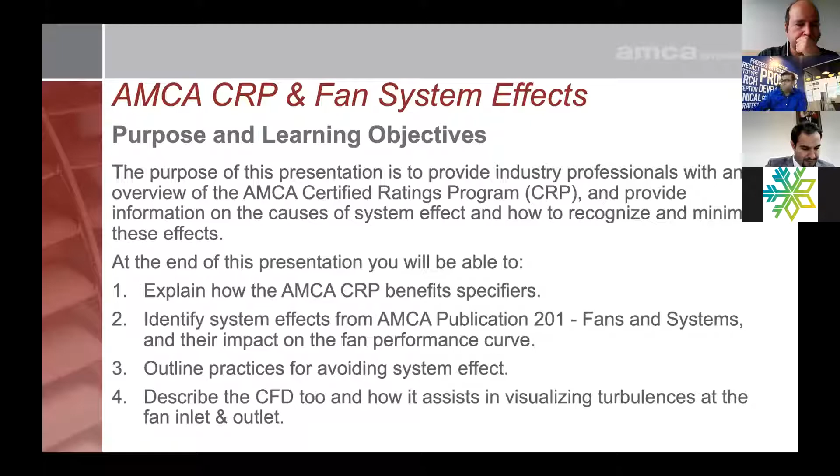So, introduction to AMCA. As you know, their prime mission or prime focus is advocacy. 80% of their part is certifications, and then they do educations like a seminar that we are doing right away.

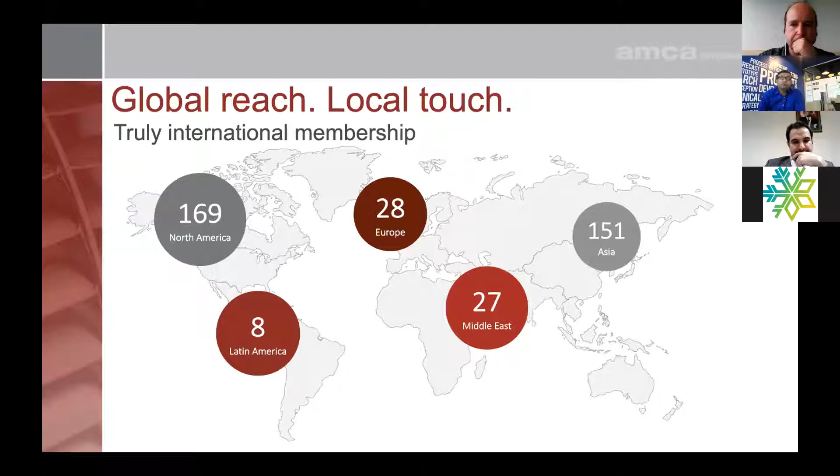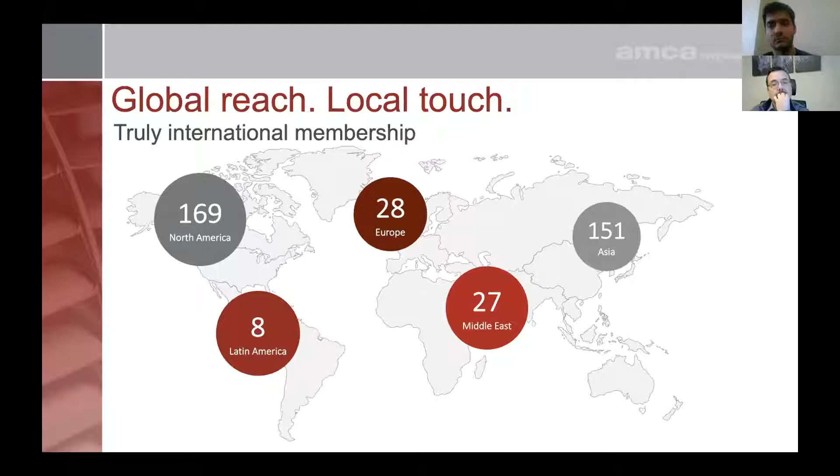So our global reach: we started as a company in collaboration with a few manufacturing companies in the US. Right now the strength is 169 in North America, then Latin America we are 8 members. Europe we are growing, we have a separate chapter there with 28. Middle East is a very promising chapter, we have a separate director who looks after this market. I'm working as a marketing committee member here, and we have 27 members. And in Asia, it's the fastest growing member among the continents, at 151 to date.

So scope, just to give you a glimpse: we cover air curtain certifications, fans for residential and commercial, fans for fire smoke control, fans for industrial processes, for power plants, fire and smoke dampers, fixed and adjustable louvers, and so on.

So if you talk about the value chain at AMCA, we provide members with international standards and publications. We do have our testing chamber, and we also do accreditation CRP programs, even laboratory accreditation programs. Obviously certifications and rating programs are part of the standards as well. Then we do a lot of advocacy, industry relations, and marketing and educations to promote the value chain, focusing more on certifications to the systems, including products together, and then how that product is going to behave in a real scenario.

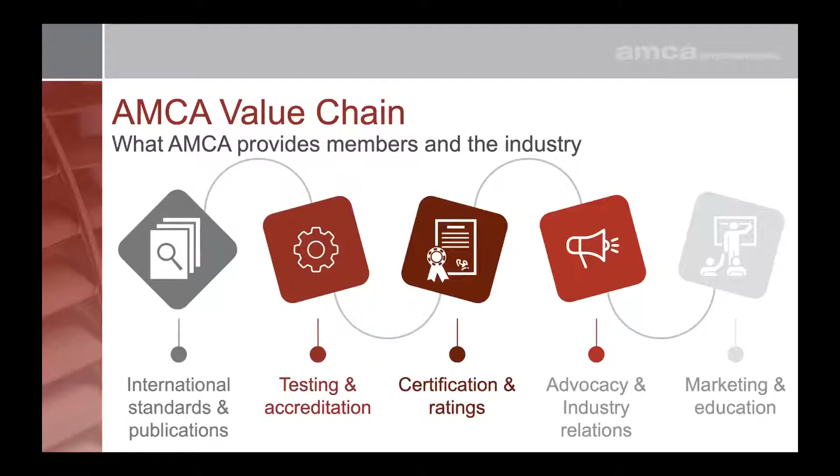So in terms of advocacy, there are legislative and regulatory bodies we are part of. We do have our own standards development process, publications, white papers, everything is part of the website. Industry relations is one of our major advocacy programs.

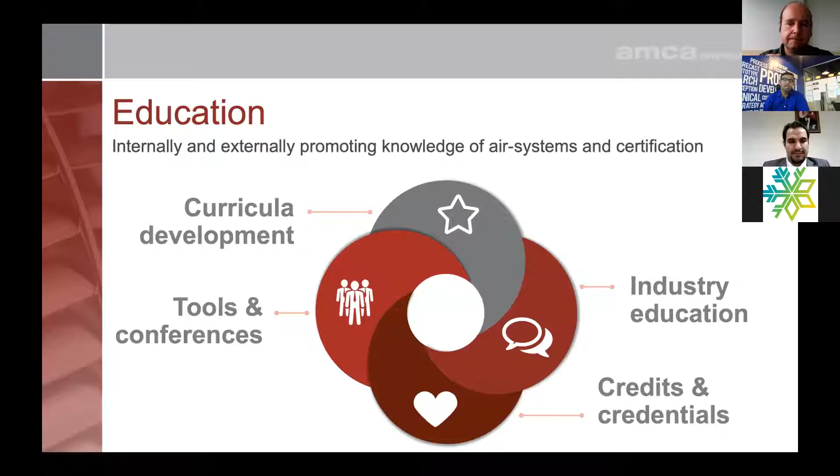In terms of educations, internally and externally, we like to promote the idea that today's presentation is generated by Mark, an executive director at AMCA. We like to focus on the areas that people are actually facing in a system and how to address those. So we do a lot of conferencing, we exchange a lot of tools, we share our knowledge, we try to transfer the past experience, especially what went wrong and what went well through the process, including building a new standard, setting up a new laboratory, or working with some regulatory body, let's say ISO 5801 and so on.

So everything is part of our website, it's a very dynamic website. If you'd like to see who is part of our certifications, who is certified, what are their efficiencies and so on, it's an easy navigating tool, you can navigate wherever you want. There's a program for educations wherever you like, and information on who are the members. So a full dashboard is available if you visit www.amca.org.

So I will touch a little bit on the AMCA Certified Rating Program, especially since building owners should know if their equipment is working day in day out efficiently or not. Air system products that are not certified are subject to heavy service and energy costs. That's why AMCA, the Air Movement and Control Association, started this Certified Rating Program.

So if you see how it started: let's say if you have a system, there's a problem ensuring product claims in their data sheets are actually meeting the standard or not. The solution is to find global standards and performance along with testing and third-party independent verification. And then you realize there should be a standard and rating program merged together, and that's how you get peace of mind that product claims achieve the rated performance. The result is a more level playing field and enhanced confidence, especially in product performance.

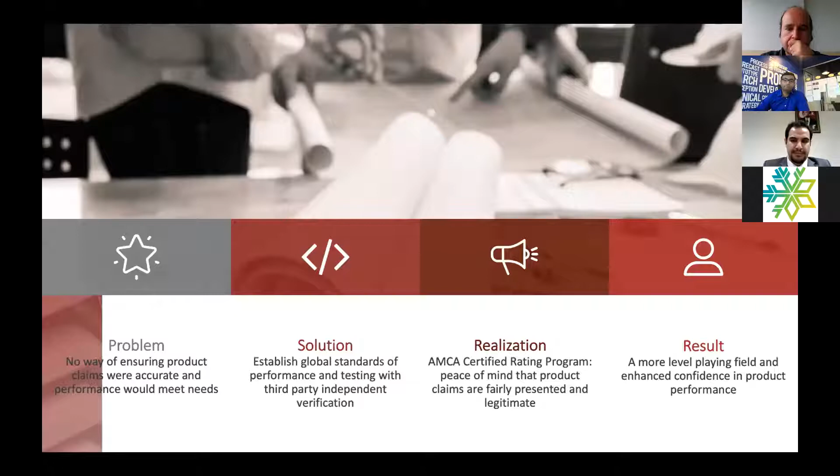So why specify products? I could see it's an apple-to-apple comparison, this is very, very important. Then you get clarity before you buy any AMCA certified products, also including reliability and ratings. Catalogs are up to date, because most of the time it's very difficult for a client to understand what they're buying; it's up to date as per the third-party certification program. AMCA has check testing to ensure that the manufacturer maintains their values within the tolerance limit as per AMCA 111.

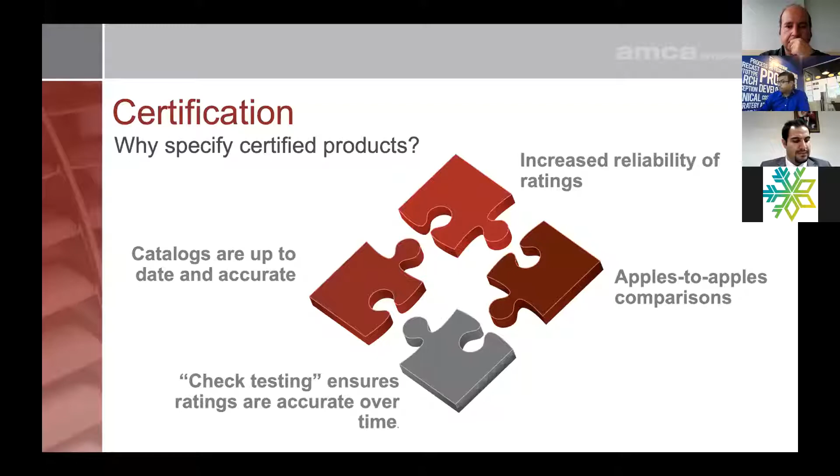So the process of CRP is very simple. First you apply, once you have a family of products, and then AMCA is going to review. They're going to pick the samples, and then there is a review program for the standards, which standards is led to. And then there is a testing and certifying process, and the authority will verify it.

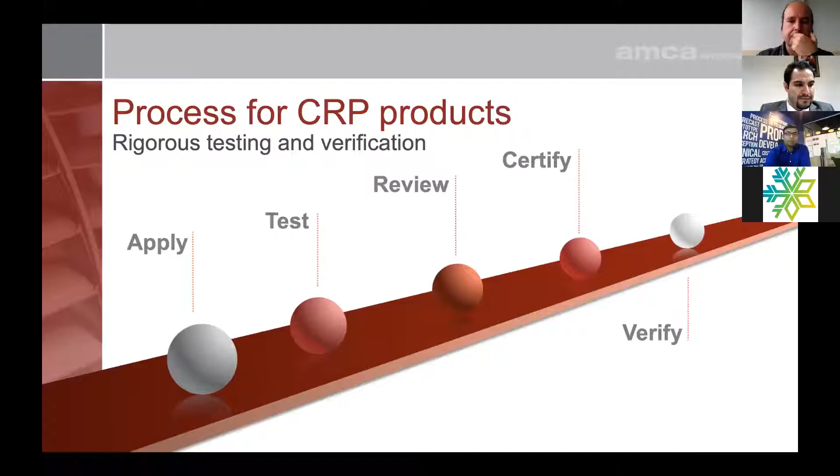Then you see yourself as a part of the website, and you officially get a seal, similar to these, whether it is air performance, air sound, FEG, wind-driven rain, or Sound Blower certification programs, whatever. But it's all part of the AMCA website. You can easily navigate through the same channel.

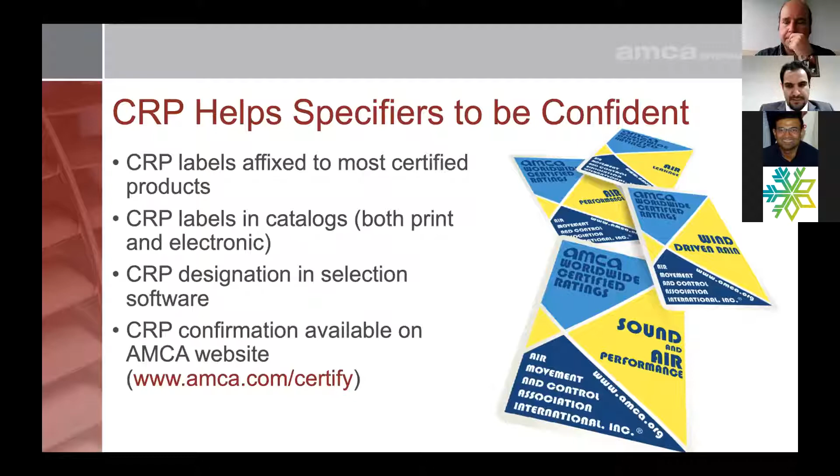So the audit mechanism is very simple. We have an independent testing body, with no bias towards any manufacturer. AMCA members and non-members alike are eligible to participate in the CRP, but it's better to be part of AMCA membership. AMCA Standards and Publications describe how the product is tested and rated.

The documents have been created with volunteers from all aspects of the air movement and air control industries. So the publications are reviewed by manufacturers, so that it's not a surprise to anyone. Once the product is certified, ongoing verification is conducted by AMCA through repeated check tests. Even if you have an accredited laboratory, they ask for repeated check tests.

Over a period of several years, product failure during any check test requires product inspection, recertification, and withdrawal as well. Refusal to comply with AMCA check tests, or failure to make the required product corrections, can result in product suspensions or CRP violations. There is another category on the AMCA website.

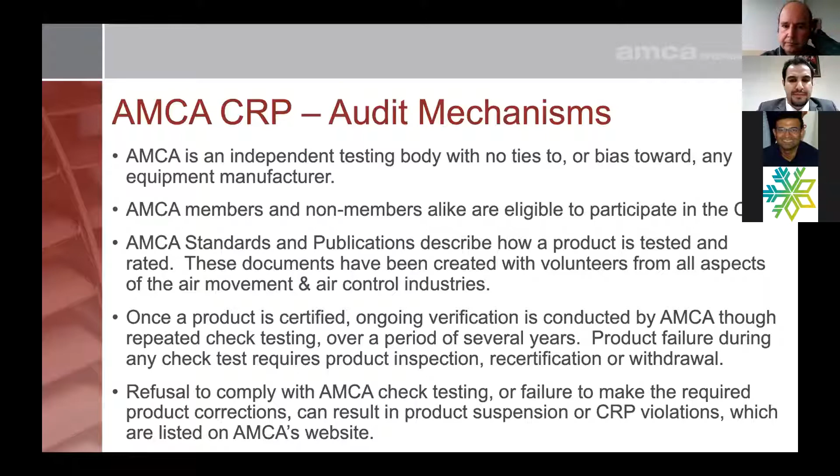Sorry, Mr. Tanmoy, sorry for the interruption. There is a problem with the sound. Would you check your microphone? It's crashing in the sound. Is it okay now? Would you speak again? Is it okay now? No, it's continuing. Do you talk with the microphone or with the computer? Okay, let me try something else. Is it okay? Is it audible? Yes, it's so good, thank you. I'm audible, right? Okay.

So let's start with fan system effects. We'll start with a quick check about fan safety. These are moving parts that can injure. Aside from the obvious hazards of the fan wheel, there are hazards of the drives, electrical components, shaft coolers, and those hidden dangers. Lockout and tag out equipment to protect yourself and others.

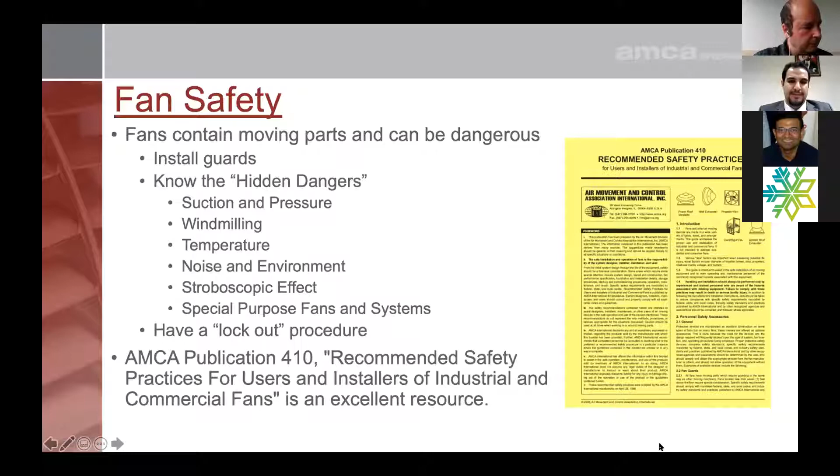Do not increase the speed or operating temperature of a fan above the manufacturer's limit. AMCA Publication 410 is available for free from the AMCA website.

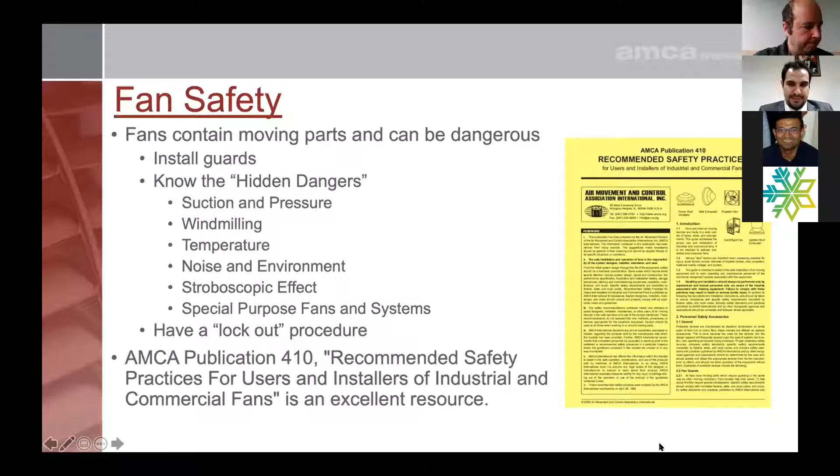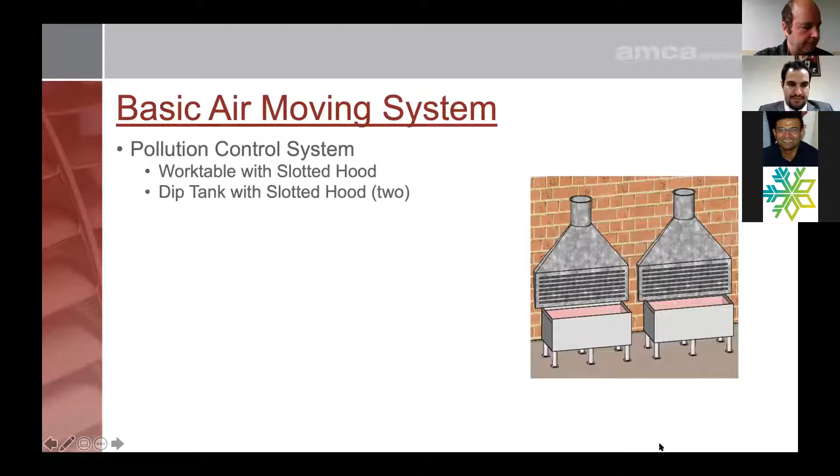So for our review of system effect, we made a basic air moving system with some standard components, which is a worktable with slotted hood. Then we have a dip tank with slotted hood. Then we have an air washer scrubber, which we also call a pollution control unit. And then a centrifugal fan, obviously with associated ductwork.

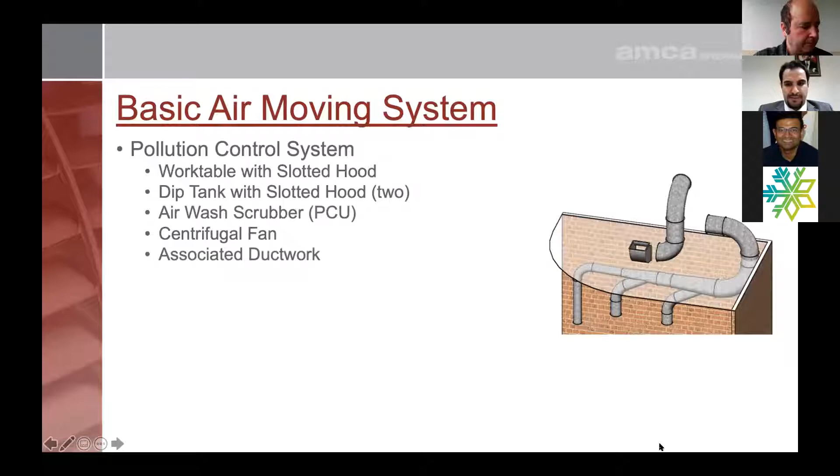And the calculation duty point is 15,000 CFM, which is 25,500 cubic meters per hour, at 6-inch water gauge, which is 1494 Pascal, at 1.2 kilogram per cubic meter density, approximately 21 degrees centigrade standard.

System effects are neglected, as you see from the picture. Not shown: replacement air in the system is taken into account but not shown here.

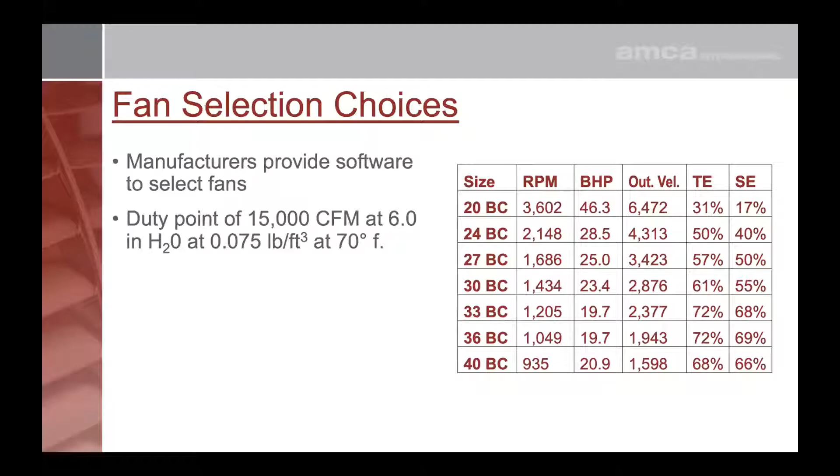So fan selection is automated and available from many manufacturers' software over the internet, desktop version. A review duty point at 15,000 CFM, 6-inch water gauge, gives 7 fans providing the required flow and pressure duty point. Although the models shown are only one model type, which is backward curve only, just for simplification.

There could be acceptable airfoil, industrial exhauster, forward curve, and other blade style selections. It seems easy at first: punch in the flow and pressure, and selections pop out. This is a short list; the list could be much longer. It's like searching a range on Amazon—a list of selections, a lot of selections, overloaded.

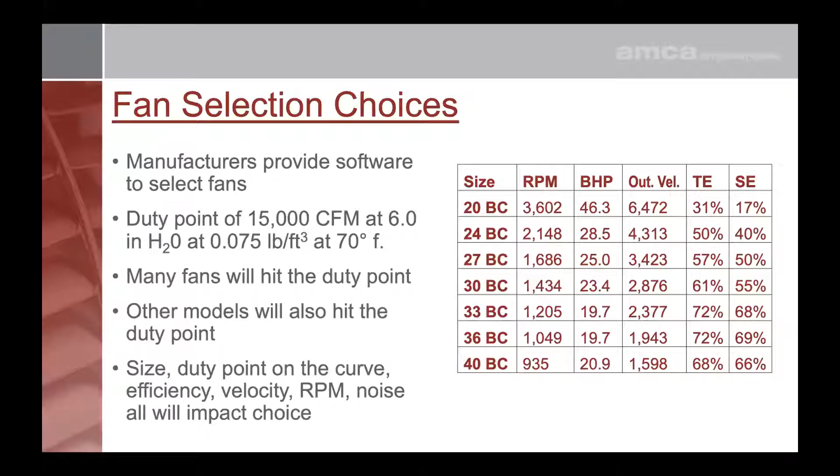There are many factors that will influence fan selections. Here are those same fan selection curves, all plotted on the same scale. All models are going through the duty point at 15,000 CFM at 6-inch water gauge. In this curve, only one power curve is shown, for the size of 33-inch backward curve.

Making fan selections can be more difficult, but the new metric, fan energy index, which is called FEI, will help make more efficient selections. Fan energy index compares fans based on the duty point and the fan's ability to hit the duty point, and its horsepower at that point.

Fan energy index is a rating of a fan's power requirement compared to an efficient fan for the same point. Fan energy index calculation methods are covered in AMCA standard 208, which was approved by AMCA international members in 2017. The standard was approved as an American national standard on January 24, 2018.

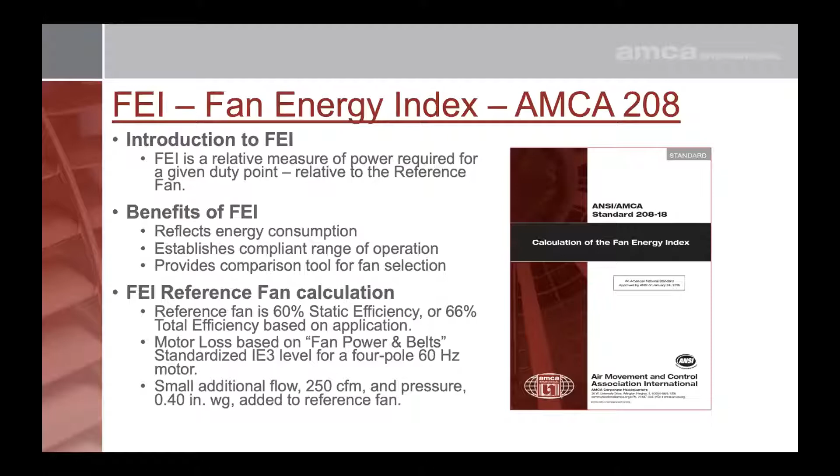Also part of ASHRAE 90.1 2019 and ASHRAE 189.1 2020. The fan energy index is an application-dependent metric, meaning that it encourages right-sizing fans so they operate more efficiently at optimal efficiencies. FEI allows comparison of fans for particular applications. FEI is replacing fan efficiency grade, which we call FEG in model codes and standards. FEG is only an indicator of a fan's general peak efficiency.

FEI is referred to in ASHRAE energy standards for buildings except low-rise residential buildings. ASHRAE 90.1 2019 requires FEI greater than 1. FEI is proposed in ASHRAE's design of high-performance green buildings, ASHRAE 189.1 2020, which requires FEI greater than 1.1. FEI is proposed for the International Energy Conservation Code, IECC 2021, which requires FEI greater than 1.

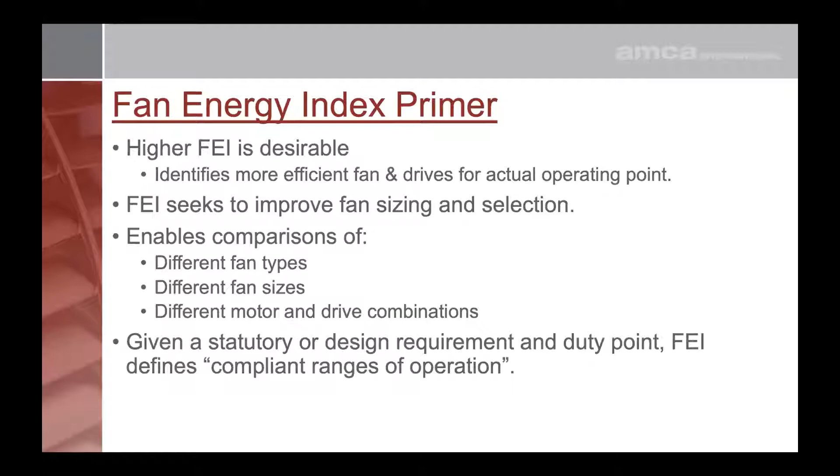FEI has many useful characteristics when sizing and selecting fans. Note our duty point. The duty point is used to calculate an efficient fan power requirement, and the fan electric power will be FEP, which is here. Then FEI equal to 1 signifies compliance with the regulations, FEI less than 1 will be non-compliance, and FEI greater than 1 will be over-compliance.

Notice here that FEI changes with impeller size and is highest at fan size 33, where the fan has the highest total efficiency and the FEP is actually lowest. FEI is the reference fan power divided by the actual fan power.

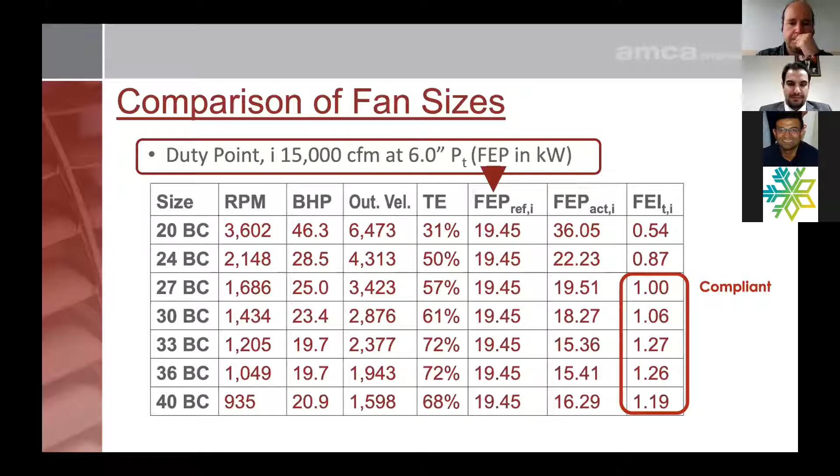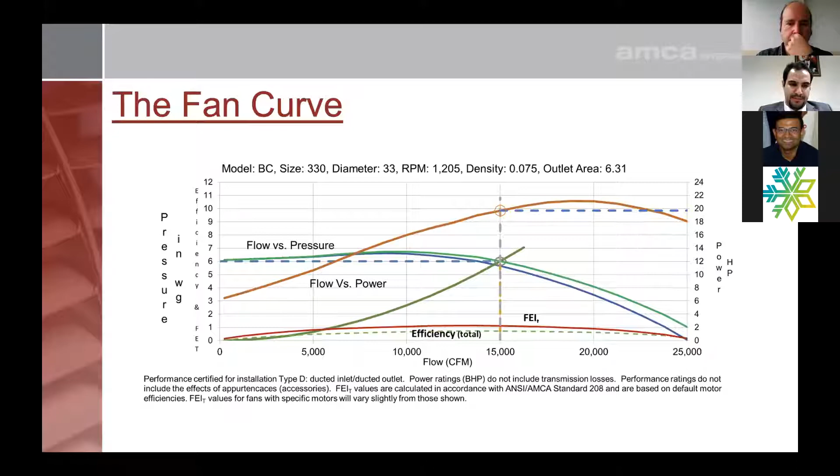Manufacturers test fans with good or ideal inlet and outlet conditions to get maximum performance from the fan. The design or installation of the fan into an air system may require other than good inlet or outlet connections. The fan performance will be impacted by the duct connections.

As you know, system effect occurs because of differences between fan inlet and outlet connections used in laboratory tests to obtain the fan performance rating. AMCA publication 201, which is Fans and Systems, gives specific detail on system effect related to fans, I think section 4.5, in these publications.

An ideal inlet condition allows the air to enter uniformly without spin in either direction. A spin in the same direction as the impeller rotation, which we call pre-rotation, reduces the pressure volume curve by an amount dependent upon the intensity of the vortex.

This is similar to the change in the pressure volume curve achieved by variable inlet vanes installed in the fan inlet. The vanes induce a controlled spin in the direction of the impeller rotation, reducing the airflow. A counter-rotating vortex at the inlet may result in a slight increase in the pressure volume curve, but the power will increase in quite a drastic way.

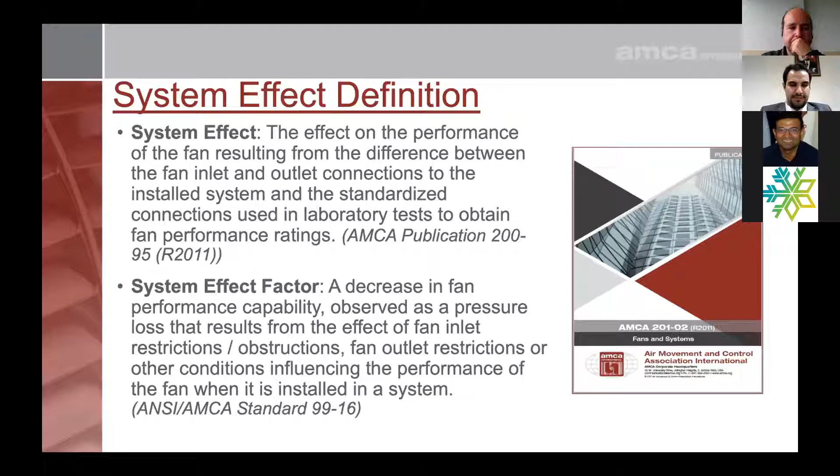An example of a system effect cause could be an elbow adjacent to the inlet of the fan. Even if the friction loss of the elbow was properly accounted for, the proximity of the elbow to the inlet of the fan adversely affects the fan performance. The change in system performance is more than the addition of the friction loss of the elbow.

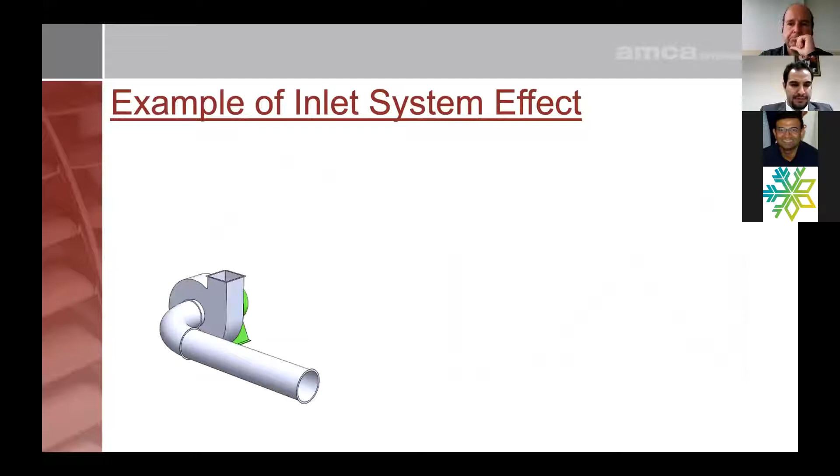In this example, we have a centrifugal fan with a straight inlet as shown. The fan performance would be as per manufacturer's standard curve. The fan must be installed with an elbow on the fan inlet as per site restriction. The air into the fan is no longer uniform, and the fan air performance is restricted.

This results in a new fan curve. The fan operates at the intersection of the system curve and the altered fan performance curve. If system effects are neglected, there will be an airflow deficiency. AMCA publication 201 provides methods and formulas to calculate the system effect.

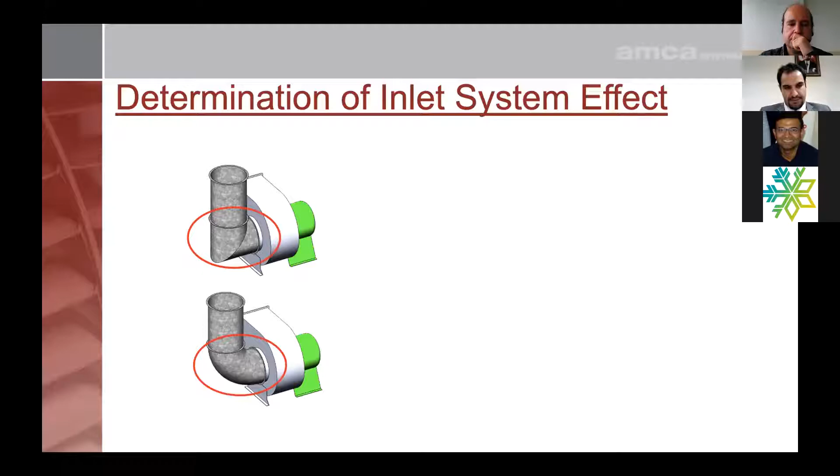In this example, we have a centrifugal fan with an elbow installed on the inlet as shown. An inlet elbow is installed directly on the inlet of the fan. The fan is shown with a two-piece mitered elbow, and the fan is shown with a smooth 1/R/D elbow ratio. The publication includes examples of inlet and outlet conditions for many fan types.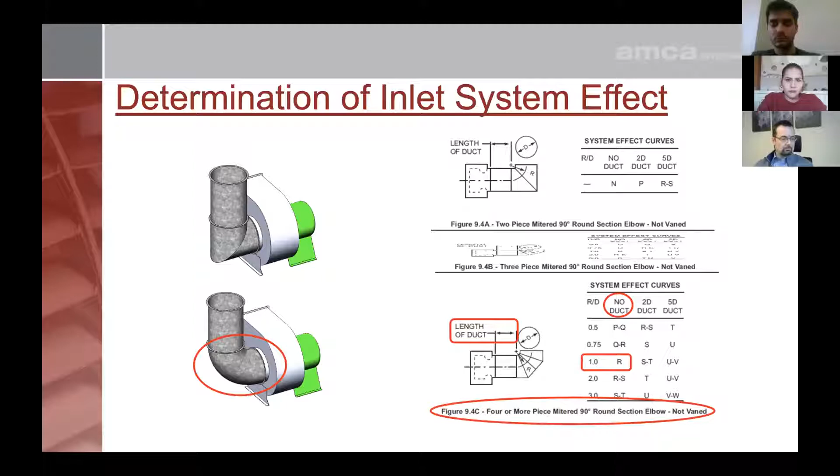And the system effect curve identifies for the 5-piece mitered elbow which is R. The system effect from the previous example is identified as curve R and S.

The system effect is velocity related. It should be calculated based on velocity at the fan inlet or outlet, and the coefficient of the curve on the figure. Table 7.1 includes dynamic pressure loss coefficients for each curve to facilitate calculations of the system effect using the formula provided.

The curve R coefficient value is 1.2. Calculate the area of the inlet and the inlet velocity to directly calculate the system effect using the formula, or you can use a log graph, whichever is possible and comfortable. We'll go over these methods in more detail.

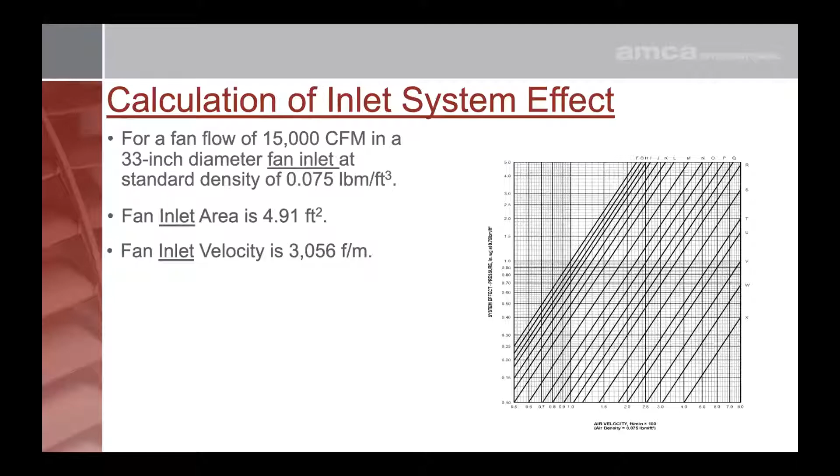So the inlet area is 4.91 square feet. Inlet velocity is 3056 feet per minute. Using curve R on figure 7.1, we find the intersection at 3056 feet per minute, and we read horizontally to the left the system effect of 0.7 inches water gauge at standard density.

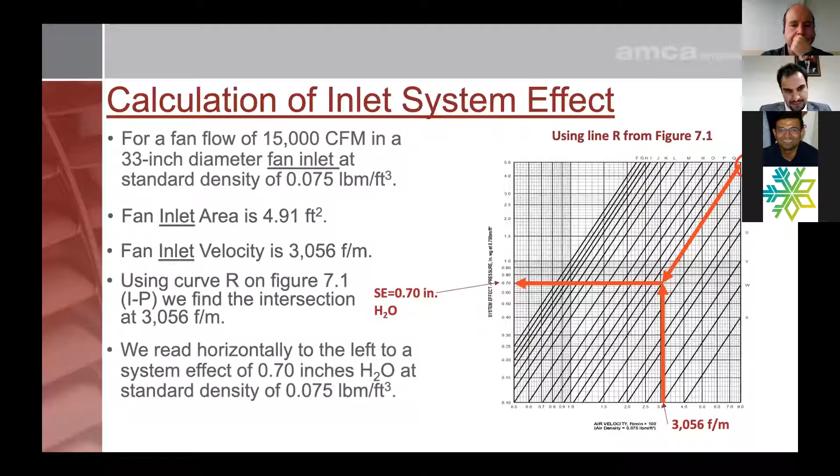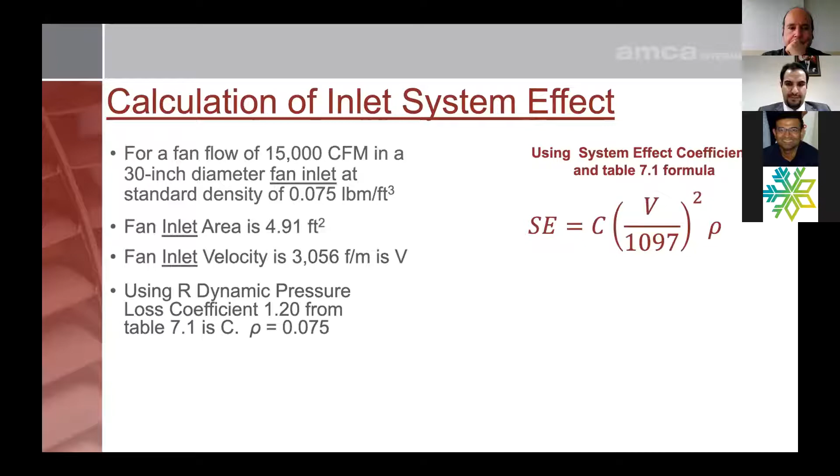0.075. So same 4.91 inlet area, velocity 3056 feet per minute. Using R pressure curve, dynamic pressure loss coefficient 1.2 from table 7.1. If you use this same formula, you're going to arrive at 0.7 inches water gauge.

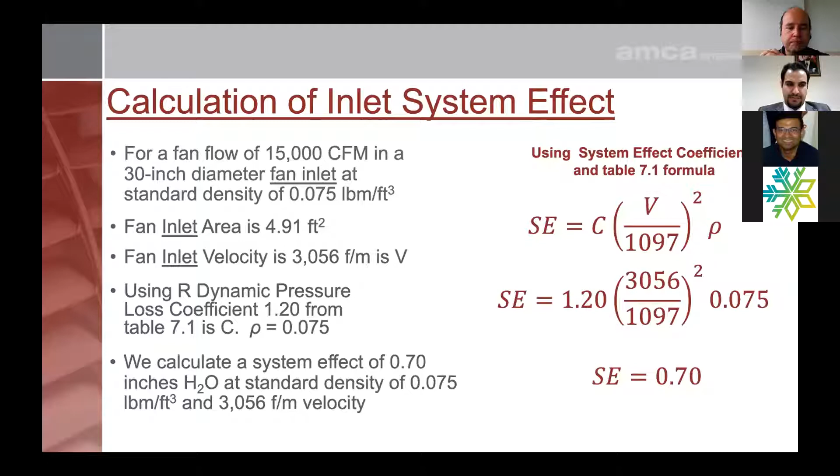So note on the curve, the system effect is velocity related and is calculated from the velocity at the fan inlet and outlet. Calculations have been done for flow point, and the system effect can be calculated for each point of the fan using this formula.

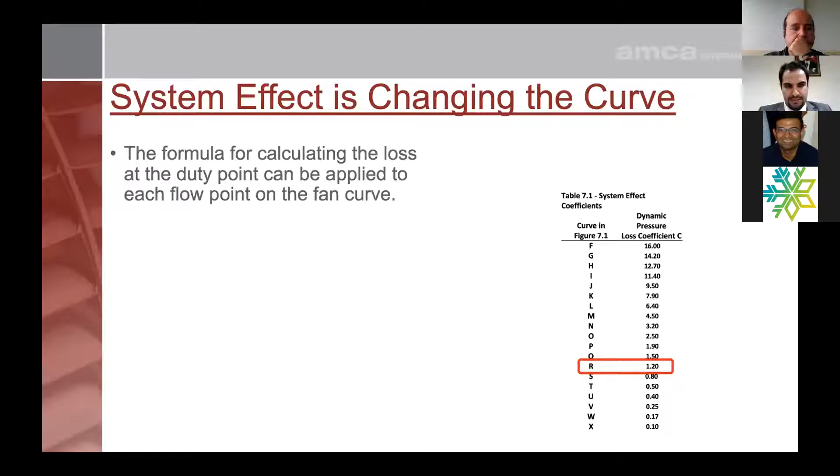So the formula for calculating loss at the duty point can be applied to each point, which here is R 1.2. Pressure loss is calculated for each flow point using the same method, so we get a complete list at different CFM, different pressure.

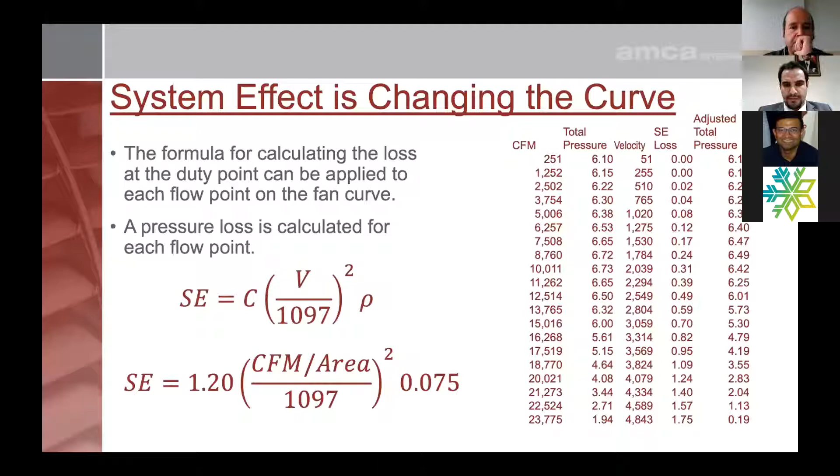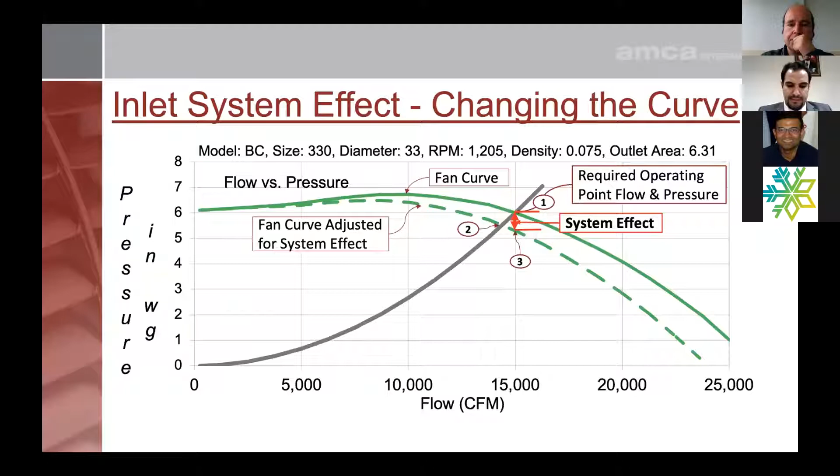As velocity increases through the fan, the effect increases because you're increasing more turbulence. So the primary difference between inlet and outlet system effect is that for the outlet, the flow profile is not fully developed after the fan. The system effect acts as an additional pressure loss on the fan outlet due to high turbulence into the fittings.

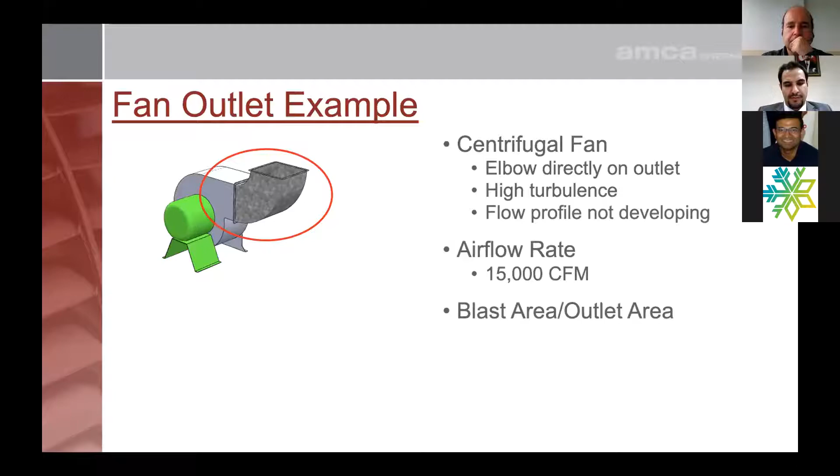So the blast area versus outlet area, in this case, we have 0.8 from manufacturer catalog. Outlet velocity is 2377 FPM. So without an outlet duct, the velocity profile cannot even out. High velocity cannot be recovered to low velocity systems.

By definition, 100% effective duct length is a minimum of 2.5 equivalent duct diameters, that is 2.5 times the duct diameter. For velocities greater than 13 meters per second, which is 2,500 FPM, add 1 duct diameter for each additional 5 meters per second of velocity.

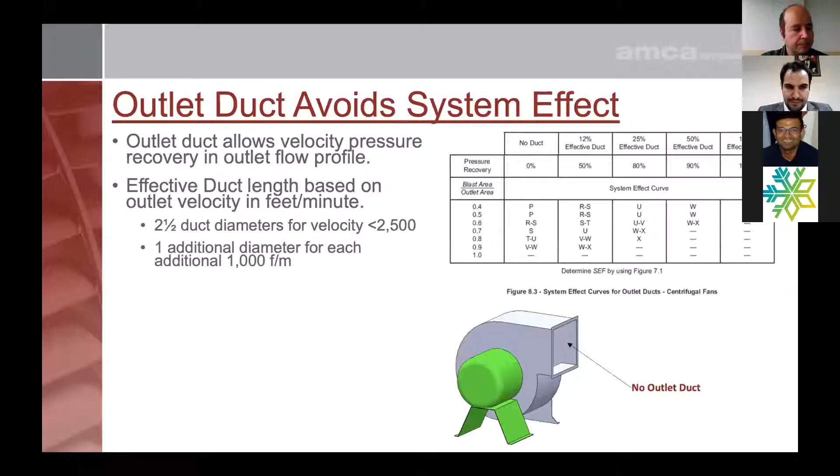For a straight no elbow outlet, we use table 8.3 as per AMCA, from AMCA 201, and the blast area to outlet area ratio is 0.8 from the example. The velocity from the example is 2,377 FPM. The flow is 15,000 CFM. Working backwards, the duct area would be 6.31 square feet. The diameter of duct with area of 6.31 square feet is 2.83 feet or 34 inches.

So the length of the duct to be 100% effective will be 85 inches. In the duct, if the duct was square, then the dimension would be 30 by 30, then the length will be 75 inches long.

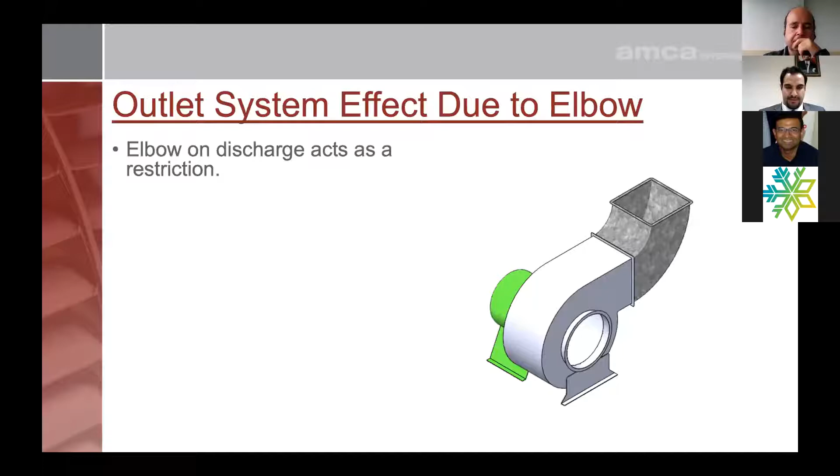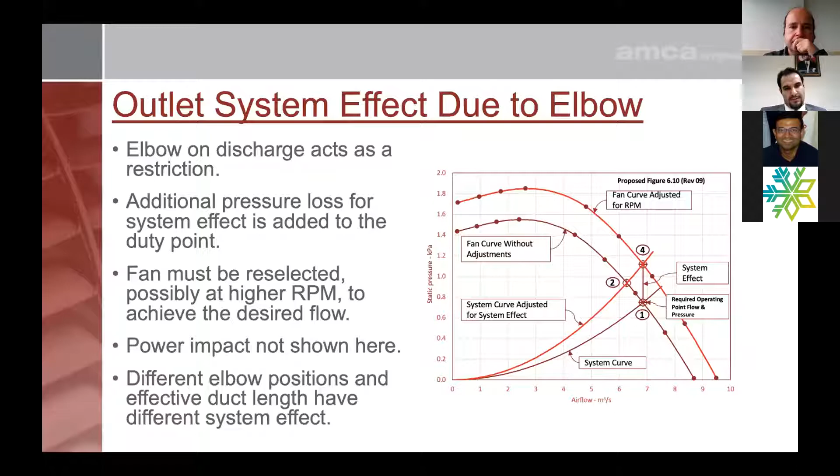Graphic representation of an additional pressure requirement for outlet system effect. Selections for operating at point 1 without considering elbow on outlet. The calculated system effect adds resistance to the system, equivalent of flow going from 1 to 4. The fan operating will deliver at point 2 with less flow and higher pressure than the original duty point. System or fan must be changed to deliver the required flow.

So without an outlet duct, the velocity profile cannot even out. High velocity cannot be recovered to low velocity streams. Elbow position matters to how much it disturbs the fan flow profile.

For an elbow on the outlet, we use table 8.5 from AMCA 201. And the blast area to outlet area ratio, we know it's 0.8 from the example. In our example system, we have a fan with no duct and an elbow in position C. Blast area elbow C with no duct, which is 0.8, Q and R.

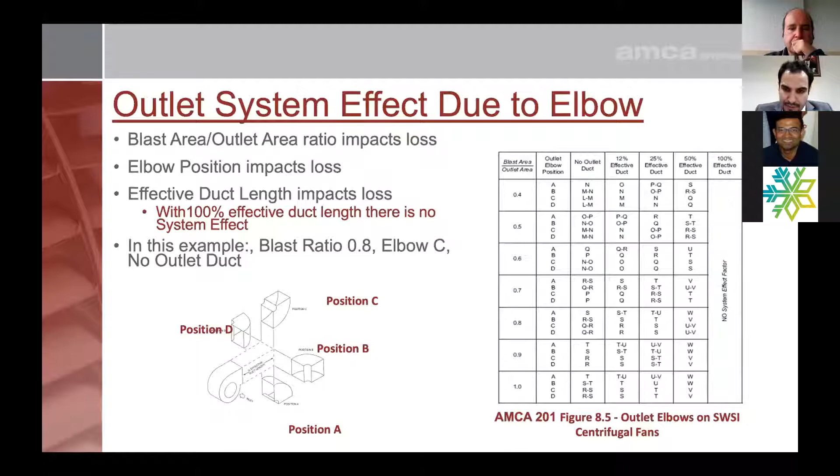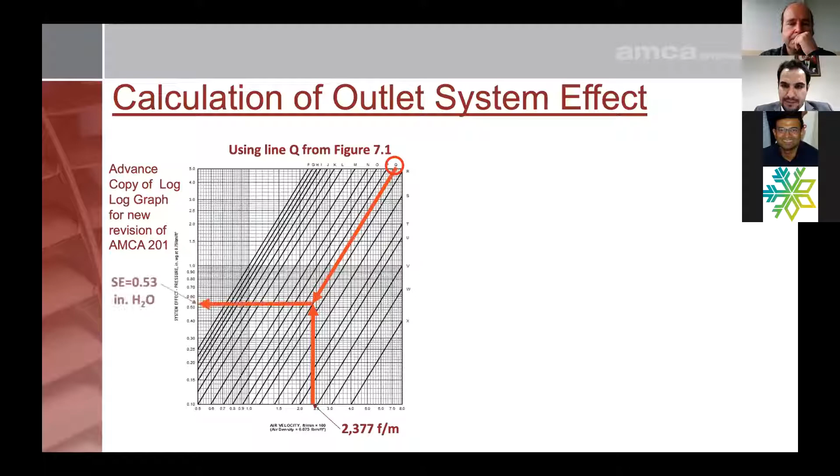So in the Q, we have 1.5. If I use the formula, we get outlet system effect at 0.53.

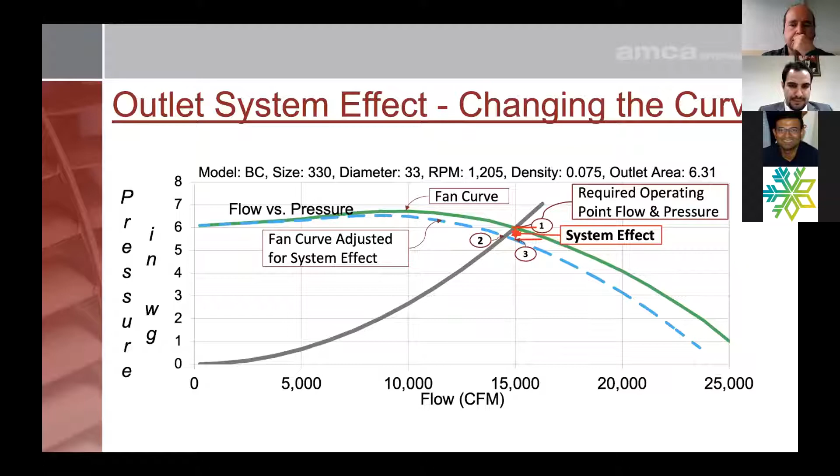As velocity increases through the system effect, obviously the effect will also increase.

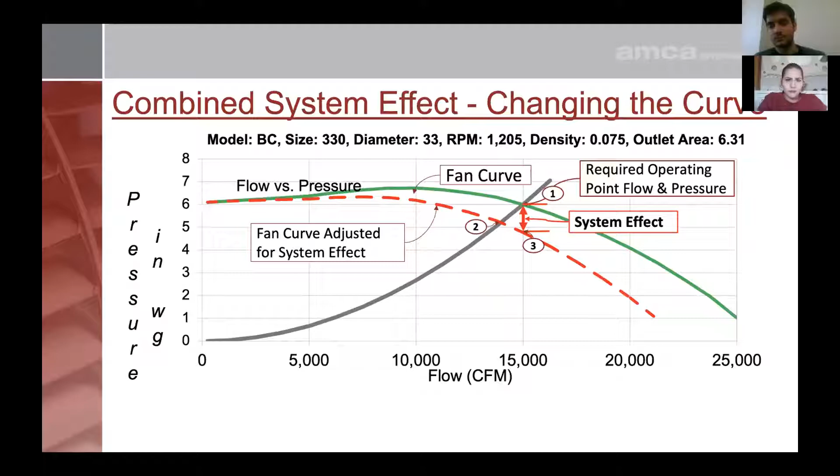So here is an original performance curve, again the green line. And the performance curve with system effect considered is the dashed red line. The duty point required is at 0.1. The flow and pressure will be at 0.2 with system effect on the fan. The difference is 1.23. So the actual scenario is 7% deficient in flow.

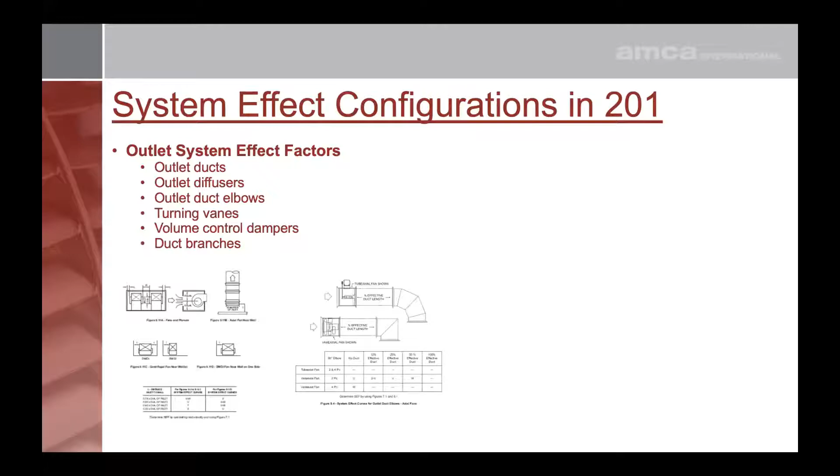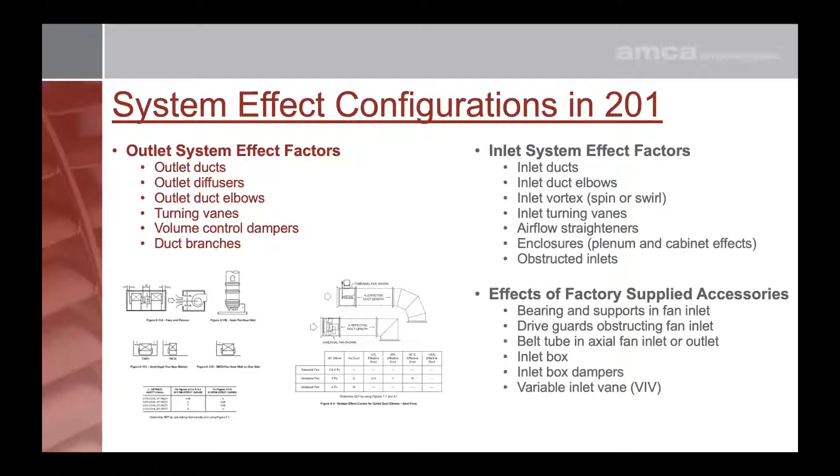So for outlet system effect factors, if you talk about inlet system effect factor and outlet, there are outlet ducts, outlet diffusers, outlet duct elbows, turning vanes, volume control damper, duct branches. Similarly, inlet system factors will be inlet ducts, elbows, vortices, inlet turning vanes, airflow straighteners, enclosure, obstructed inlets, and so on. Factory supplied accessories like supports at fan inlet, drive guards. If it's an axial fan, belt tubes, inlet box, damper, or VIV.

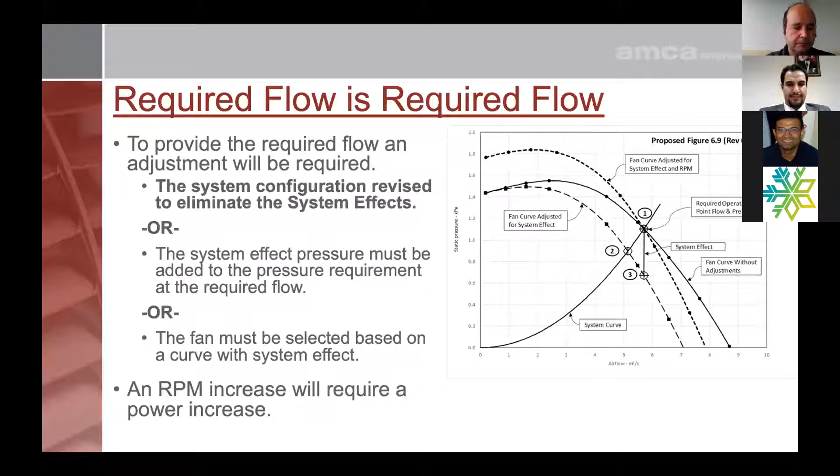Note that the fan speed needs to be increased to meet the desired airflow rate. The power could be increased by the increase ratio, cubic percentage.

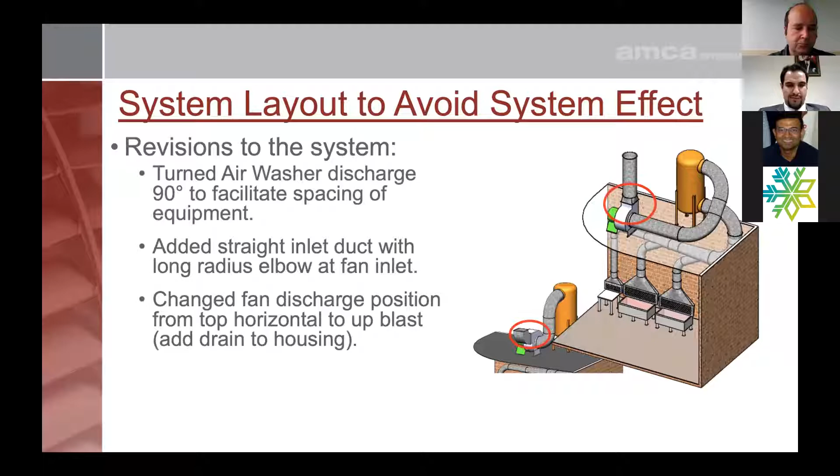Recommended changes to the system to avoid system effect: turn the air washer discharge 90 degrees to facilitate spacing of the equipment. Add a straight inlet duct with a long radius elbow at the fan inlet. Change fan discharge position from top horizontal to upblast. Add some transition and outlet duct to the fan.

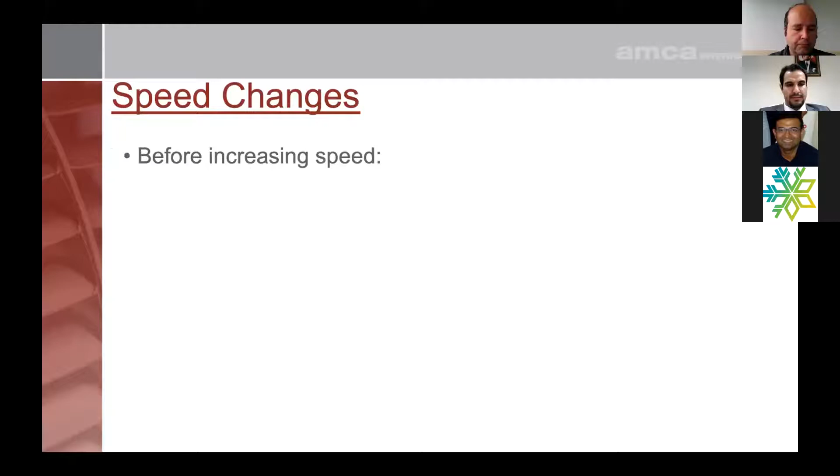So before we touch the speed change, what measures can be taken to reduce system effects? Turn the fan without an elbow, if possible. Change the design position of the fan to remove the elbow. Add a no-loss stack fan. Add turning vanes at the elbow.

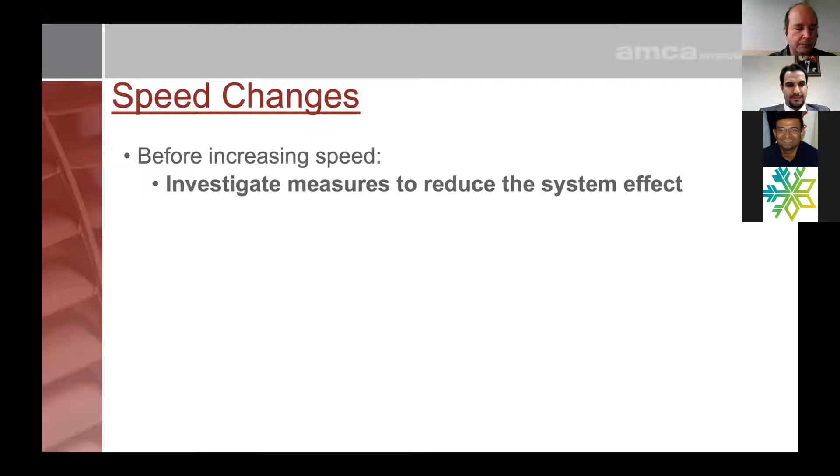Before committing to spending on energy for the life of the system, evaluate the alternatives. If you must increase the speed, remember the fan safety practices. Can you take other measures to eliminate the system effect? Always check manufacturer recommendations before you touch the fan speed, because there will be critical speed limitations and the maximum speed related to it.

The fan laws can be used to generate new fan speed to provide the required flow or pressure. The fan laws can also be used to estimate the new power curve. Power will be changed based on the speed change cubed.

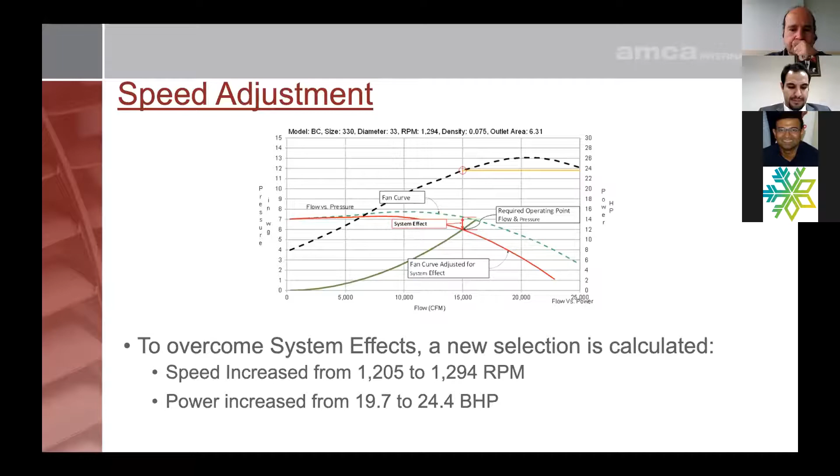In this example, the speed increase is 7.4%. The power is estimated by the fan laws. The power increase is 1.24, a 24% increase from 19.7 to 24.4 BHP. The operating point on the curve changes slightly, which accounts for the difference. The FEI reduces from 1.27 to approximately 1.05 based on system effects.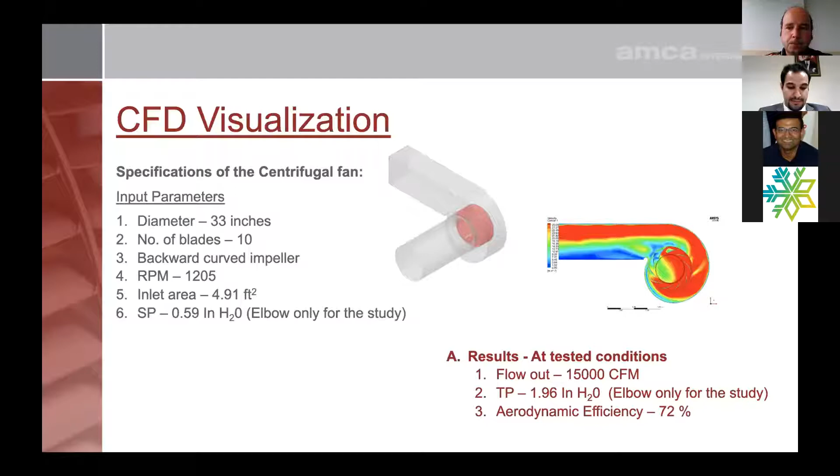So I have assumed only the elbow losses, keeping the same RPM at 1205, number of blades at 10. A 3D model and CFD were done as per laboratory test with effective duct length. Results from the original installation without EDL are almost 7% lower than design air performance.

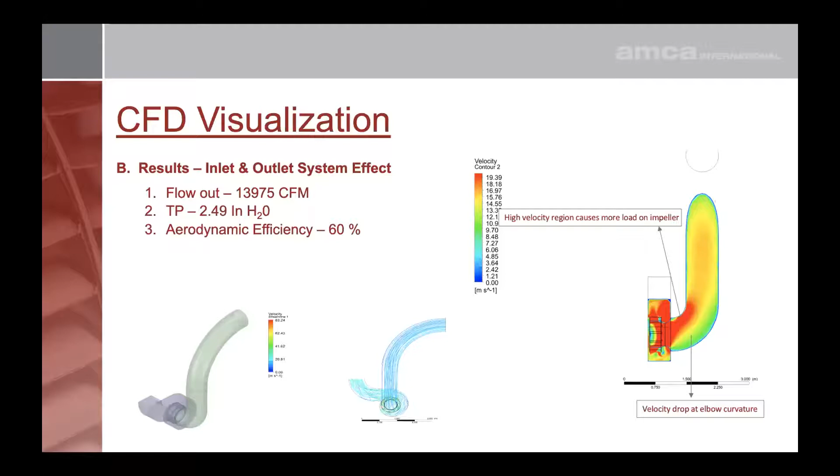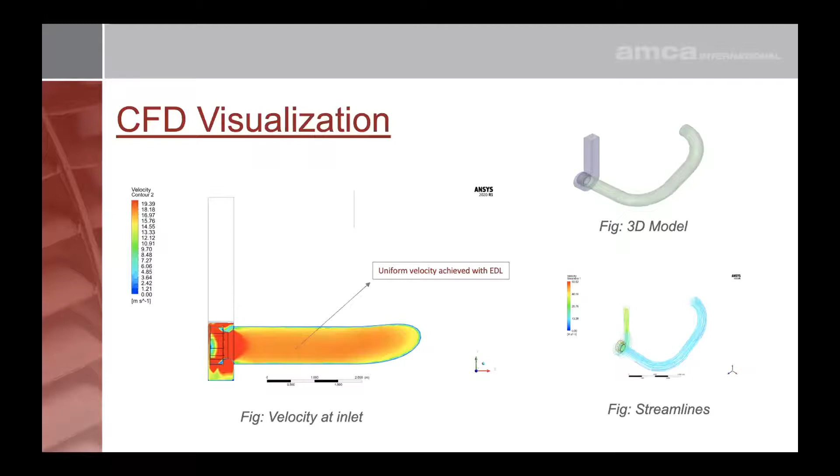Design change to the elbow, a design change to allow more air at the fan inlet. Fan orientation changed to upblast, and then uniform velocity achieved with EDL. I have added a small video to visualize this.

This is an example of one pollution control unit installed but not achieving catalog performance. The performance of the unit as per the duty point is 11,500 CFM at 750 Pascal. But the site measurement shows it's still at 10,355 CFM.

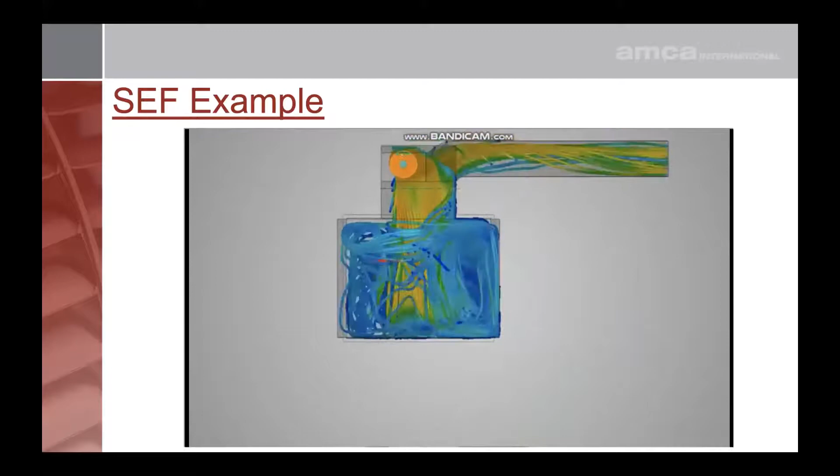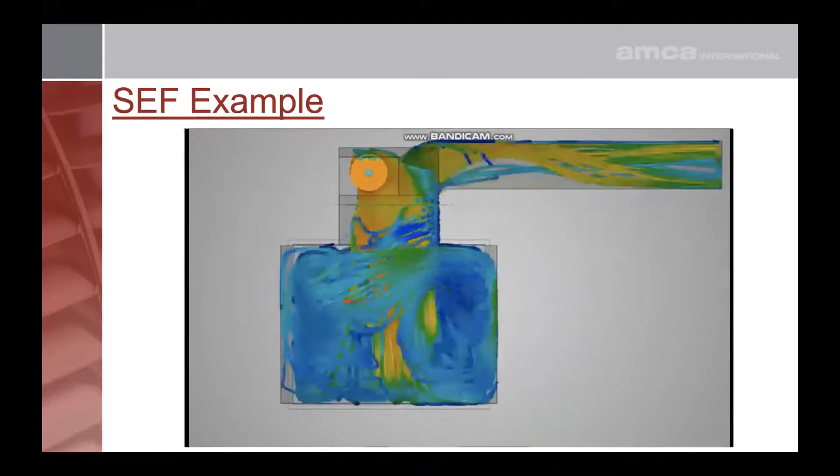Even after drive adjustment, it even dropped 10% more. The CFD output, as per the study, shows the output velocity dropped from 2108 RPM, which is 10.7 meters per second, to 9.1 meters per second of the blower, resulting in a 10,355 CFM flow rate. In this case, the obstructions of the airflow are inlet and outlet plenum with immediate elbows. Then there's a proposal that a straight duct with plenum gives better performance of the blower and increases the outlet velocity.

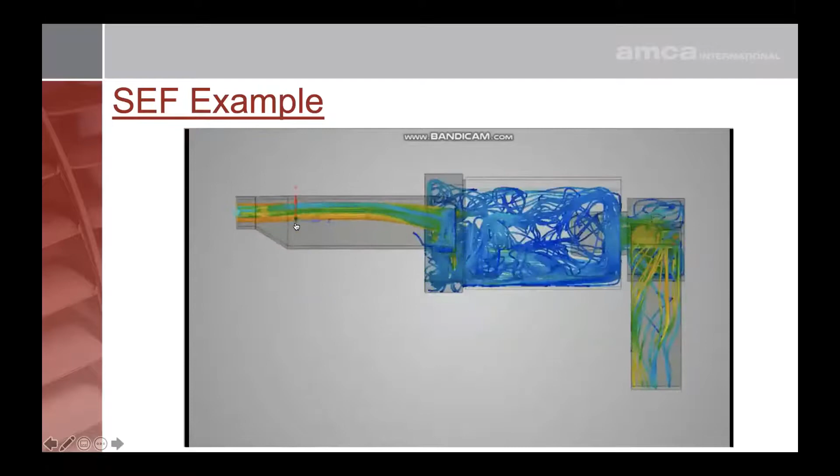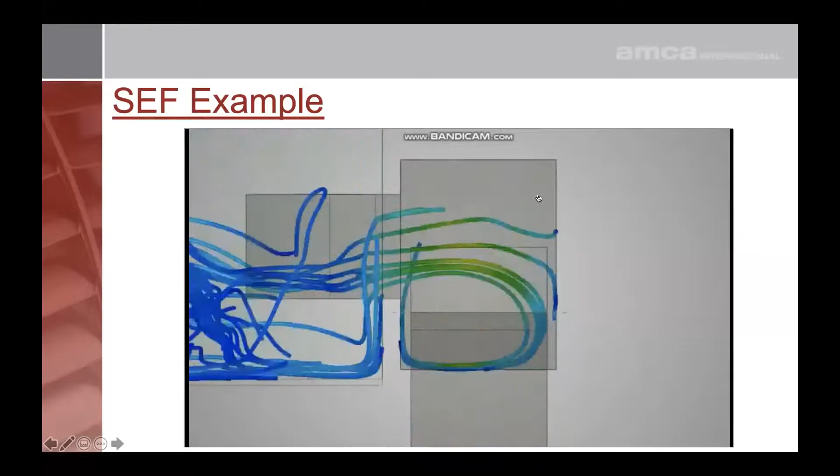Increasing fan RPM may result in more turbulence and produce more noise as well. The inlet should be designed to modify in such a way that the velocity drop should not vary drastically. You can easily visualize a lot of turbulence here, which results in a system effect. If you increase the velocity, you're increasing the turbulence.

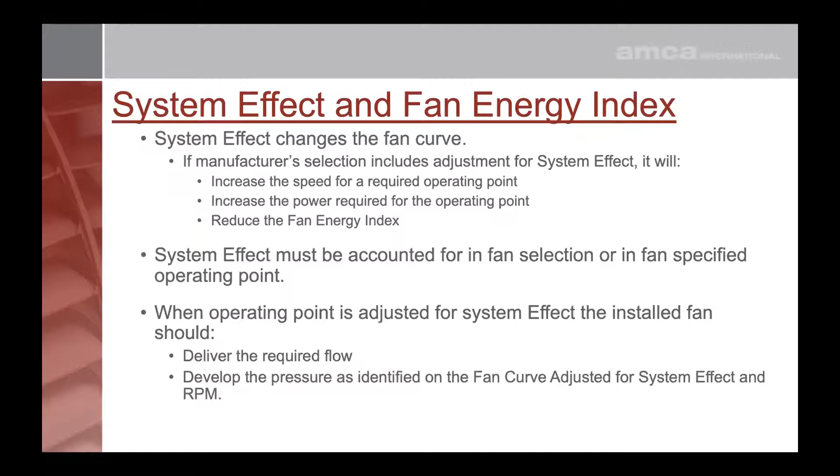System effect changes the fan curve and increases the power required, fan speed, and noise. System effect has to be accounted for to get the required flow from the fan. When system effect is accounted for, the flow should be as specified.

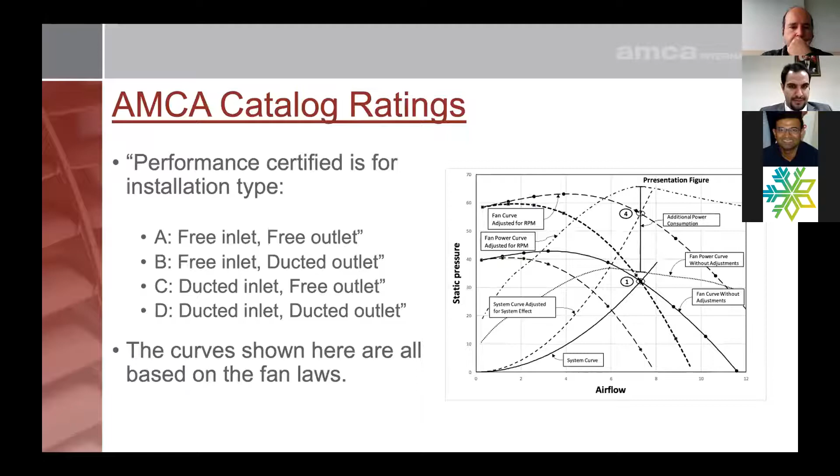These ratings are found in the catalog of certified products. For certified products, it's mandatory to include this statement so that the user knows how the fan was tested and whether it matches how the fan will be installed. The fan curves used in this presentation are based on the fan laws and calculations.

Here are a few rules of thumb to avoid system effect. The first one is 2.5 duct diameters on the outlet. Minimum 3 to 5 duct diameters on the inlet. And avoid inlet swirl.

Take into account that the total cost of the building is the original capital cost plus the cost to operate it: system effect cost, operating energy, and noise.

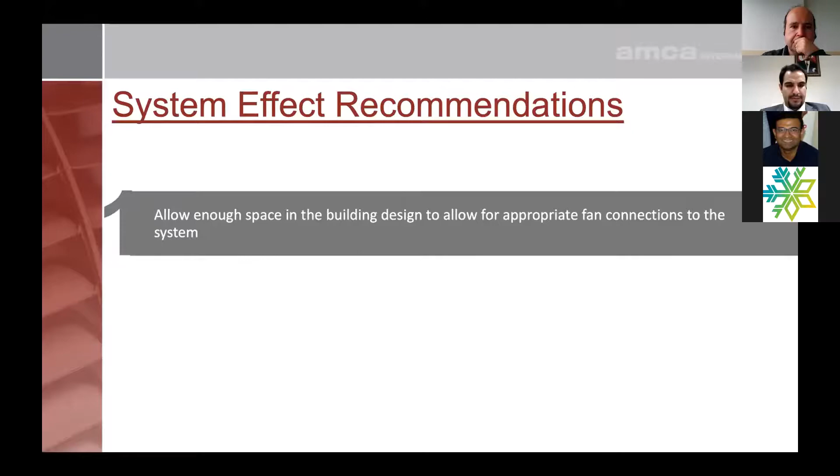There are some recommendations. First, allow enough space in the building design for appropriate fan connections to the system. Use allowances in the design calculations when space or other factors dictate less than optimum arrangement of the fan outlet and inlet connections. If you can't avoid system effect, take it into account in the specifications for flow and pressure, or select the fan with the specific system effect calculated in the fan curve.

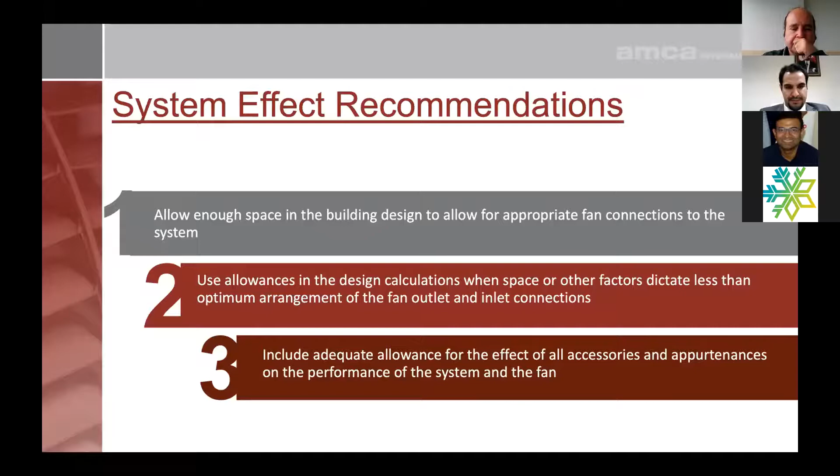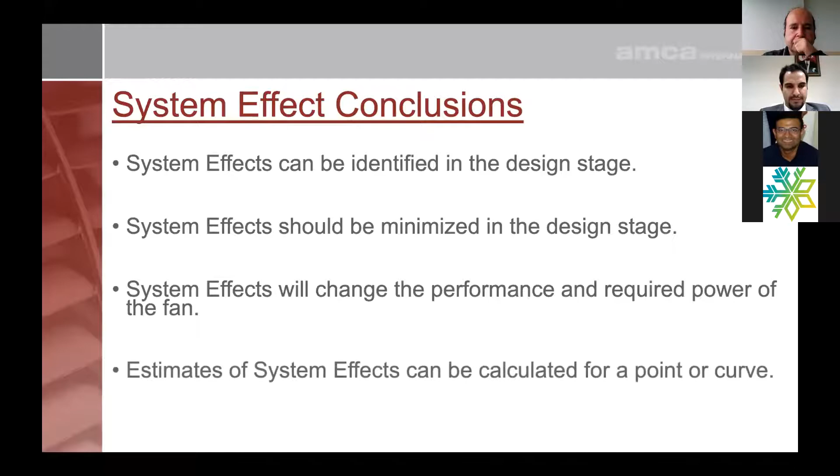So, system effect can be identified in the design stage. System effect should be minimized in the design stage. System effect will change the performance and required power of the fan. Estimates of system effect can be calculated for a point or a curve.

For resources, system effect is covered in detail in AMCA publication 201-2, called Fans and Systems. There is a variety of resources for system effect, including AMCA and ASHRAE.